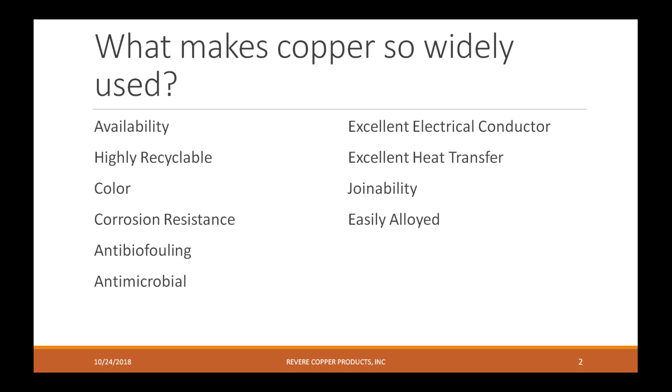So what are those properties and how do they compare? We're going to start with the atomic structure of copper. You don't have to know a lot about the atomic structure to understand that the key thing is that outer electron layer, the outer shell. There's one electron in that outer shell, and that is the same in gold and silver. And that one electron gives it a lot of those properties that make it similar to gold and silver as far as reactivity and conductivity.

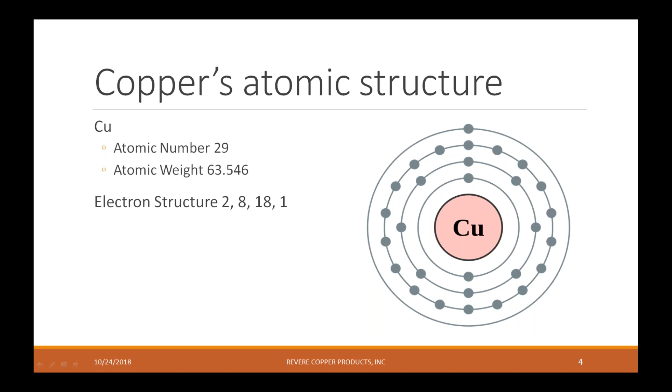So here's kind of a comparison. You can see the electrical conductivity of silver at 105, copper at 100, gold at 70. Those three are pretty close. And there's a significant drop when you get into aluminum, and it goes all the way down to iron at 17%. And then for thermal conductivity, you'll see copper also very similar to gold and silver, and then you see a drop for aluminum and then all the way down to iron.

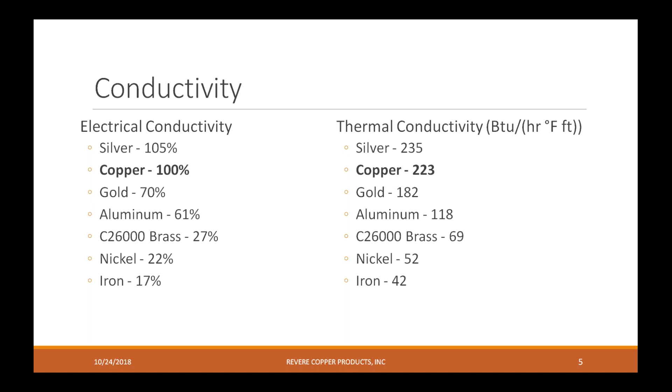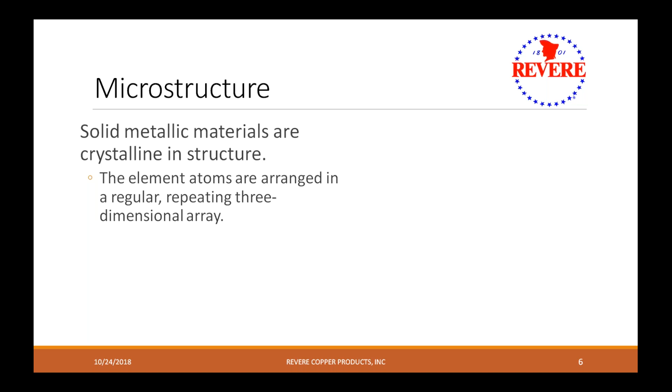So what makes up all those properties? We're going to dive deep down into the microstructure of copper. All solid metallic materials are crystalline in structure, and with copper, it is in a structure called face-centered cubic. So if you look at that picture, you can see that those black dots represent atoms in the crystalline structure, and the black dots in the center of the face are what make it face-centered cubic.

Now that crystalline structure determines its physical properties. And the face-centered cubic elements tend to have better ductility and better malleability. Silver and gold also fall in there.

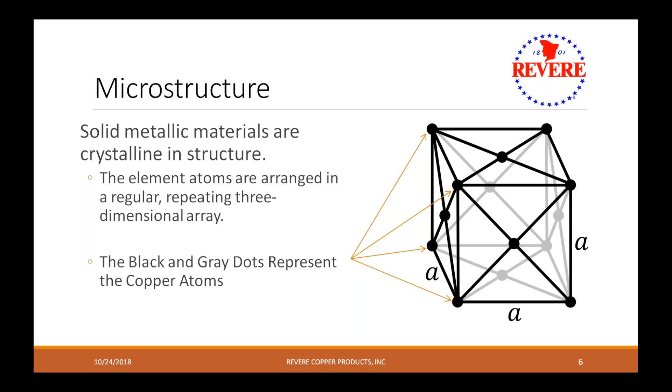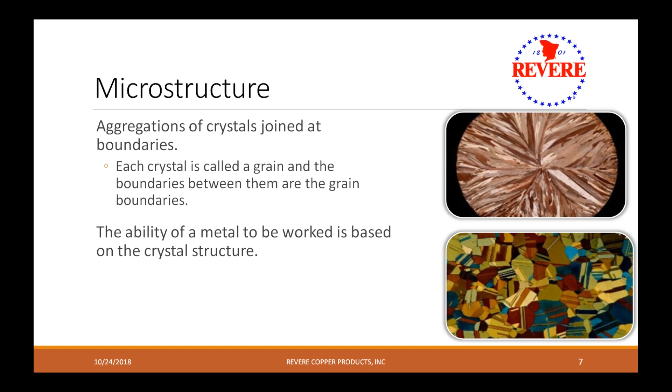So if you look at copper under a microscope, you can see those crystals. Each of those crystals is called a grain, and the boundaries between them are grain boundaries. The top picture actually shows a billet that was cast, and it freezes toward the middle, and the grains grow toward that freeze point, so the grains are elongated towards the middle. The second picture more closely resembles copper that's been rolled or cold worked and annealed, so in that case the grains don't have directionality. The ability of metal to be worked is based on this crystalline structure, so what you can do to it, what it's capable of.

So what can you do and what can you measure with copper? You can measure the ductility, which is measured by yield strength and elongation, strength, which is measured with tensile strength, the hardness, and then it also has electrical conductivity.

So customers look for different properties depending on end use. Obviously, conductivity would be really important in electrical applications, but if it was going to be drawn into, let's say, a deep bowl shape, ductility and elongation would be extremely important. Or if it was going to be used as a structural support, you'd want high tensile strength.

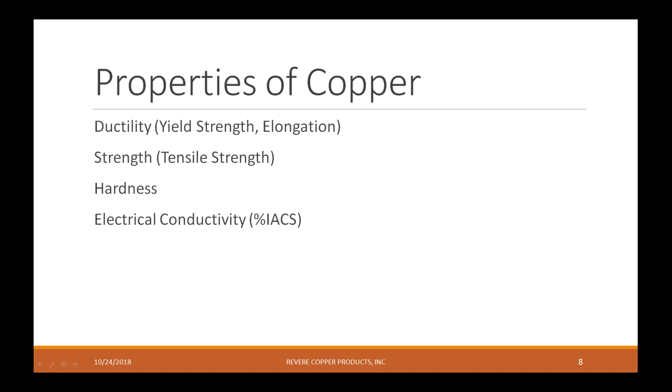Now, you can get all of those properties from copper depending on how you cold work it. So how are those properties developed? Cold work is basically doing any work to the metal while it's cold. What happens is those crystals are deformed and it causes stress and it raises the tensile strength or hardness. Some examples of cold work are rolling, drawing, or hammering.

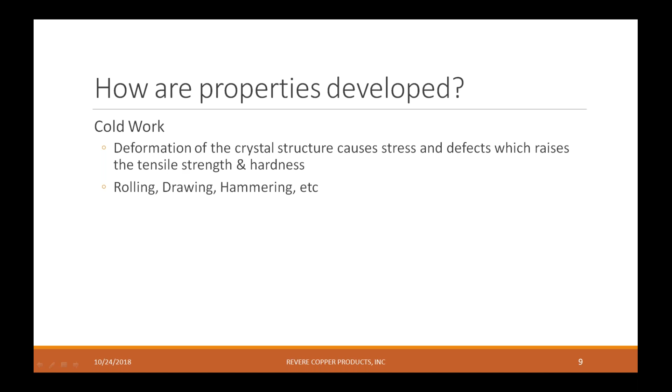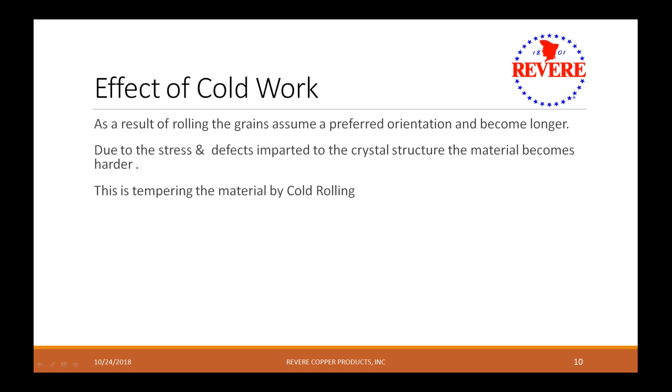So what happens to the metal? As a result of rolling, the grain assumes a preferred orientation. It becomes longer—I'll get a picture here. Due to the stress and defects that are put on that crystalline structure, the material becomes harder. And so that's also called tempering. You've tempered the material by cold rolling.

So you can see when it's first going into that first set of rolls, the grains are big and they're non-directional. And then as you roll it, the grains get smaller and squished and elongated and they become directional.

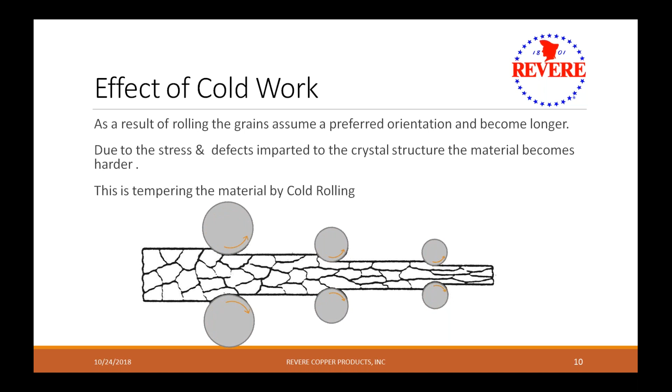So I have a picture of what that would look like under a microscope. That first picture more closely resembles the structure after it's been maybe cold rolled and annealed. So you've got good grains, good grain structure. You can see it. There's not a lot of directionality.

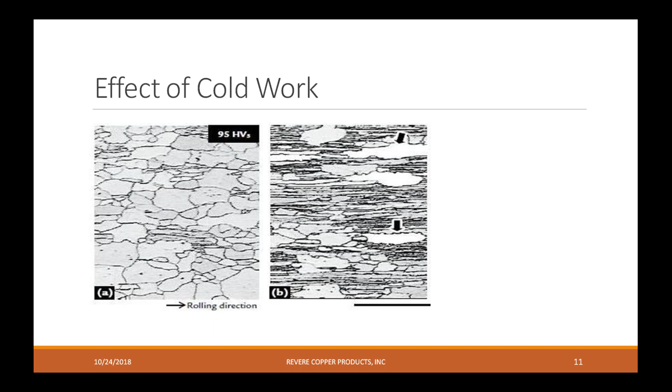Then as you start to do a reduction through rolling, those grains get squished. They start to get elongated and directional. And eventually, they almost get smeared out. You can barely see the grains in the last picture. That's after quite a bit of cold rolling, it would look like that.

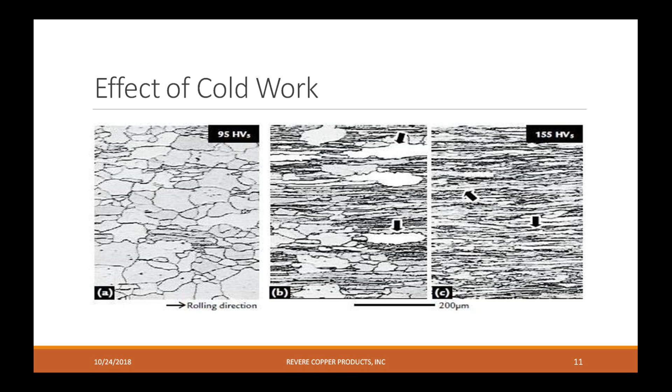So a little slide on what cold rolling is. We have many configurations for rolling mills. This would be a 2-high configuration. In this case, you've got 2 big rolls that are putting pressure on the metal, which runs through the middle and does a gauge reduction.

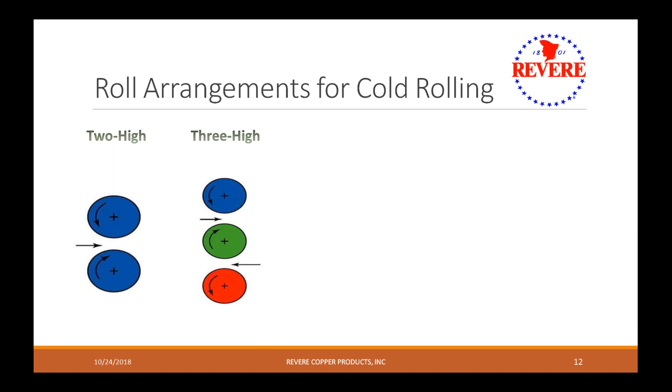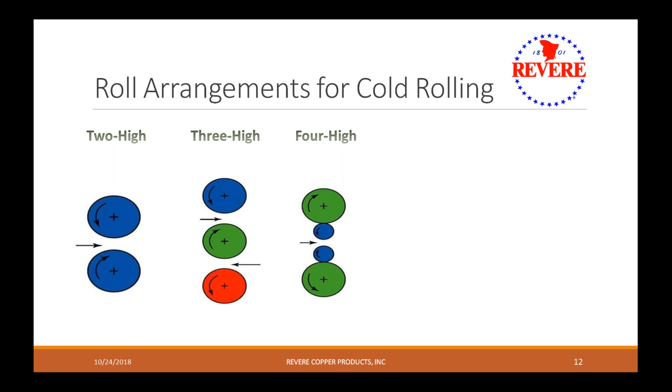And then there's also a cluster mill design, or a Sendzimir mill. With the cluster mill, you've got a lot of rolls. You've got driven rolls and bearing rolls, and those tiny rolls in the middle are your work rolls. The cluster mill gives you some better gauge control usually and some better shape control than some of your other mills.

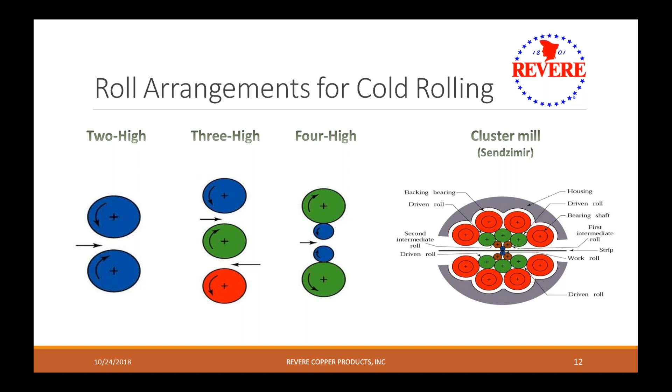So what happens to the metal mechanically while you're rolling it? As we mentioned earlier, you make it stronger. You add strength to it by deforming those crystals. That top slide shows an increase in tensile strength as you reduce the thickness.

So let's say you started with a piece of copper that was a 1/2 inch thick roll of it, and you rolled it down to a 1/4 inch. You did a 50% reduction. Your tensile strength would go from about 200 up to, it looks like, about 350. And then your elongation at the same time is going to go down—that's your ductility. So as the metal gets harder, it becomes less ductile. So at the same reduction, going from a 1/2 inch to a 1/4 inch, your elongation will go from about 40% down to almost nothing.

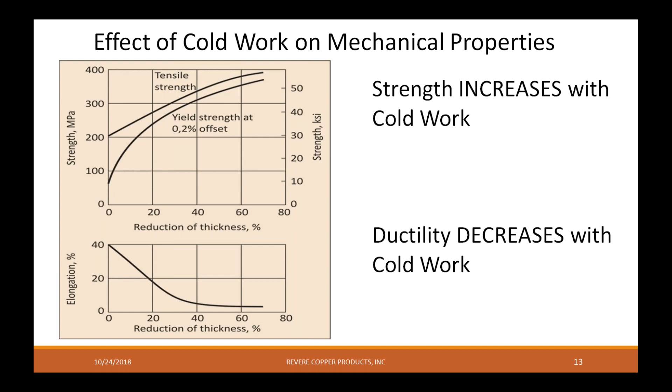So strength increases with cold work, and ductility decreases with cold work. That's really the takeaway from that.

Now, when a customer orders copper, they're looking for certain properties. So if they wanted both strength and ductility, they would have to order something that's got some cold work to it, but it's not full hard. For example, a roofing copper would be ordered generally at quarter hard, because you want the hardness, you want it to be resistant to dents if it's going to go on the roof, but you need it ductile enough to be able to form the seam.

So this is an example of different hardnesses for hard metal that's ordered, and the key to getting that property is a percent reduction in thickness after the last anneal.

So back to my other example where I did a 50% reduction, that would be extra hard on this chart. If you look at extra hard, and you went from a 1/2 inch and rolled it to a 1/4 inch, you would have a 50% reduction, and your tensile strength would be 47 to 56, and it would be designated as extra hard, or H06.

This chart shows all the different options that you can order metal through, and this is the ASTM standard.

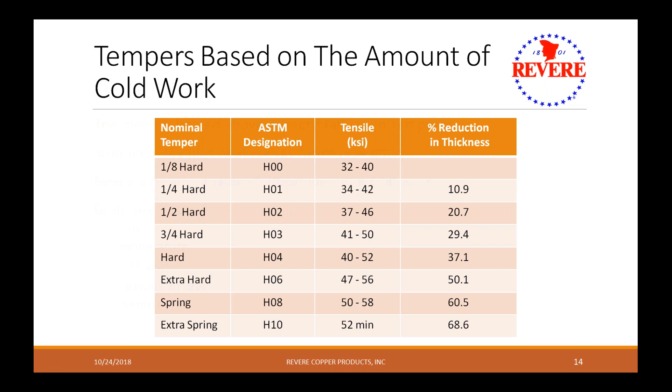So now I mentioned that your hardness is dependent on the reduction after the last anneal. So what is annealing? Annealing is basically a reset for the metal. You can't just roll and roll and roll, because it gets harder and harder, and you get to a point where it takes too much force to do the reduction.

So you anneal it. Let's say I gave that example of a 1/2 inch down to a 1/4 inch. Well, let's say your metal starts at a 1/2 inch, but you want to order it at 0.01 gauge. You might not be able to roll it from a 1/2 inch down to 0.01 — it would get too hard. So you have to have a reset at some point in there, which is what annealing does.

With annealing, the metal is heated above its recrystallization temperature. Stored energy plus heat energy forms new grains, so those grains grow again, and those new grains are capable of absorbing more cold work. So now you can roll it down further.

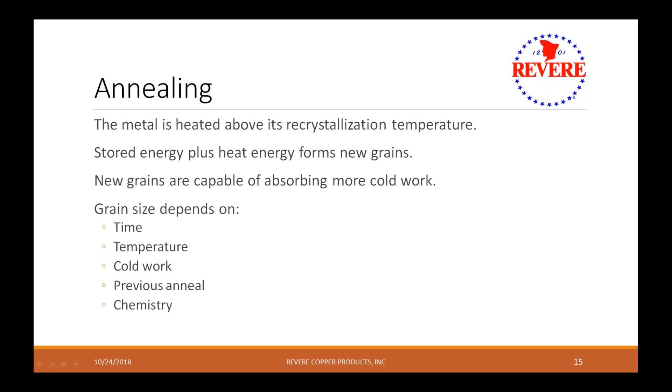So the grain size depends on time, temperature, the cold work done previous to the anneal, and if there was an anneal done previously, and also the chemistry — how pure it is, if your copper is 100% copper, or if there are impurities in it. Metal can be ordered soft, and when it's ordered soft, it's annealed as a final step. And when metal is ordered soft, frequently it's ordered to a certain grain size, so there'll be a little bit more about that moving forward.

So just a little bit more about annealing. This graph shows the hardness versus annealing temperature if it's annealed for 30 minutes with 60% prior cold work. If you think back to that other chart I showed, 60% means it was spring hard, or H08, and then it was annealed for 30 minutes.

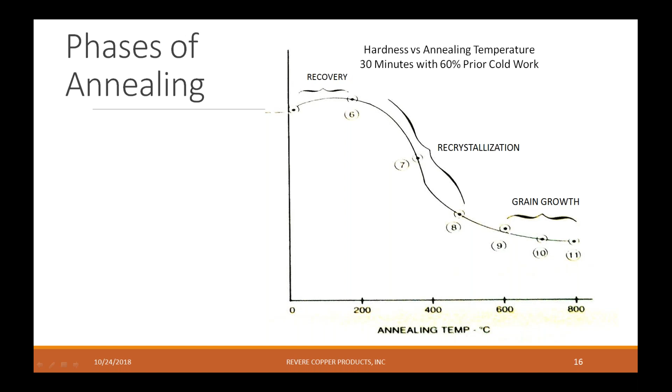You can see that at 600 degrees, you start getting grain growth. At 400 degrees, you have recrystallization happening. So depending on how much grain growth a customer wanted, that would be determined by the temperature, and also time. This next slide shows a little bit about time considerations with annealing. So you can go with a lower temperature and a longer time. Basically, higher temperatures shorten anneal time, or lower temperatures require a longer time, and that's for grain growth.

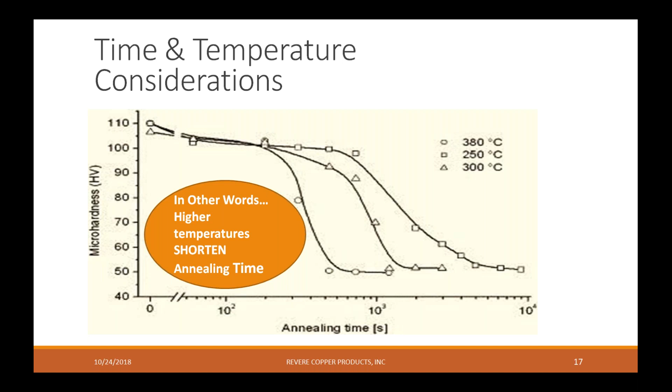So if you were going to order soft metal, what would you see from different grains? Some considerations of grain size: the first one is strength. Fine grains result in lower elongation and higher mechanical properties. That would be if you annealed it just so it had recrystallization but not much grain growth — you can get stronger copper, but it's not going to have the ductility or elongation.

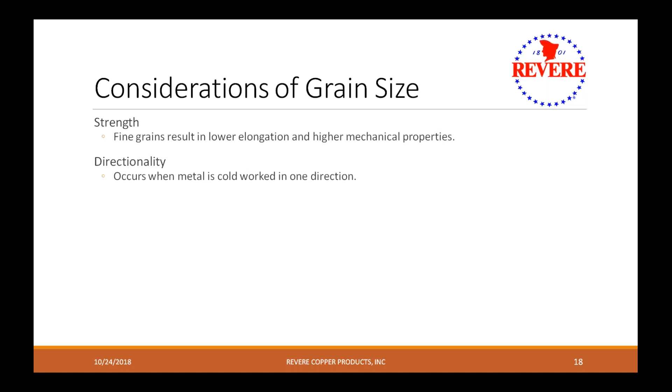Directionality occurs when metal is cold worked in one direction, so we create directionality when we roll it. Then when we anneal it, you're trying to remove some of that directionality when you're growing your grains. Depending on the grain size, you will retain some directionality. If you wanted big grains, you can remove that directionality, but with little grains, you might retain some of that — so you might have stronger metal that's got some directionality.

Formability kind of goes along with the strength — it's kind of the opposite. The larger the grains, the fewer the boundaries, the greater the potential for deformation. That just means you can pull it deeper, make a bigger bowl or a deeper draw on it if it's got larger grains. And then the more grains it has, the less it will draw.

And then finally, surface. There's a condition called orange peel, and if you do a lot of cold work to metal prior to annealing, and then anneal it to the point of a lot of large grain growth, large grain structure, you can get a surface that looks like orange peel. Whereas if you anneal it for a shorter amount of time or a lower temperature, you'll have a smoother surface — it'll give you more of a cold work looking surface if you have fine grains.

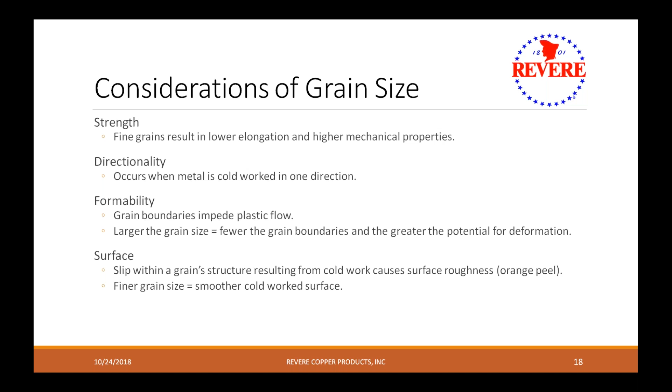So I'm going to put that all together for you, a lot of information to process into basically what do you do when we're rolling metal.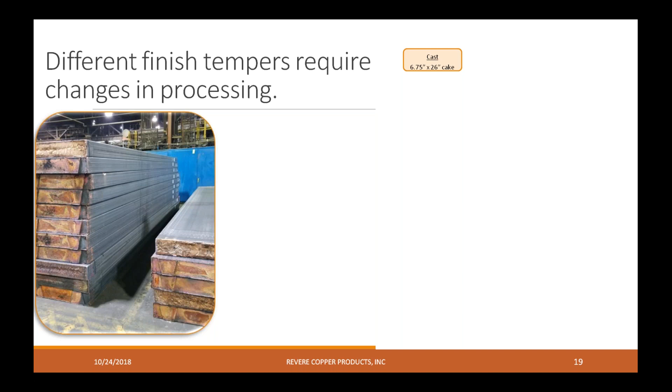So we cast these cakes, also called ingots in the market, and they are 6 3/4 inches thick, and they're black on the outside. That's an oxide that forms, and that has to do with the copper being highly reactive. It's heated to 1700 degrees for 2.5 hours. This particular cake was 6 3/4 inches thick, 26 inches wide, and 25 feet long.

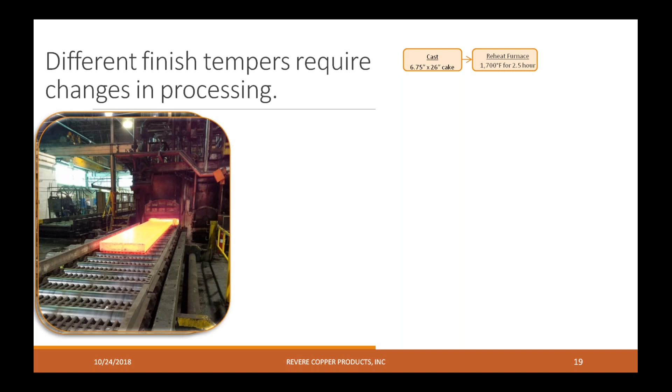So now it gets rolled, from that 6 3/4 inches thick down to 0.55, which is a little bit more than 1/2 inch. But this work is all being done while the metal is hot, so this is not cold work. So when this metal comes out as a coil that's about 1/2 inch thick, it's in that reset condition. It's basically been annealed. It doesn't have directionality, it's got big grains, and it's ready for processing.

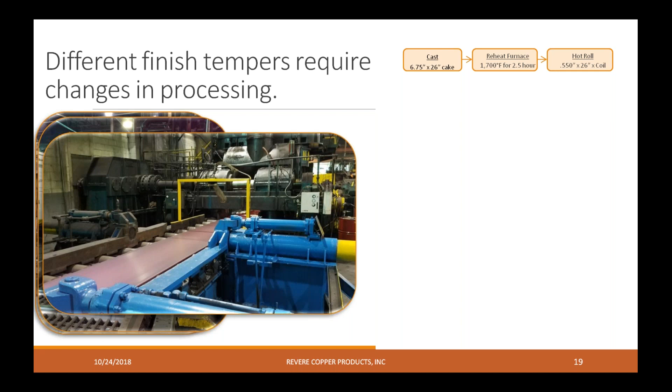The first step is an overhaul process, and that's because when you heat the metal, you get oxide. So those cakes were black. As this coil, once it's rolled at 1/2 inch thick, will be black, it'll have oxide on both sides of it. So the first step is to remove that oxide. That's milled, so it's physically scraped off and removed. So there isn't any squishing of the metal or cold work of the metal there.

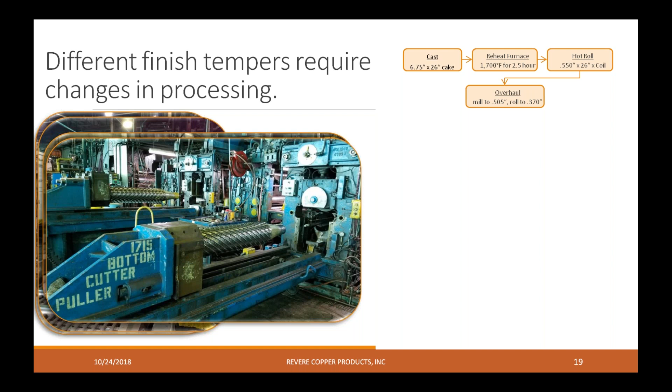So again, you don't have any cold work between 550 and 505. But then our next step, this is where the cold work starts. We roll it to 0.370. So we take that metal and we roll it down further, depending on the order and the final gauge.

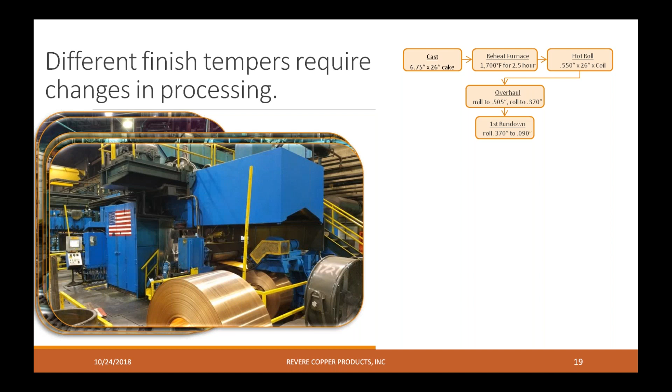And I'm running through an example here, I'll show you what we're headed to in a minute. So the next step is we continue to cold work it from 370 down to 090. That's a 75% reduction, that's a lot of cold work. So this metal is going to be extremely hard at this point.

We can continue to roll that metal, and in this example, we roll it down to 0.042. So now we haven't had any anneals since that 0.505 gauge, and it's very, very hard metal. So for this example, we're trying to make 0.0295 gauge, and I'm going to show you soft on the left side and 3/4 hard on the right.

So the next step is to anneal it. It's gotten extremely hard, and basically we need to anneal it to continue with the reduction. But that 0.042 isn't a random gauge. We didn't just roll it from 090 to 0.042 because that's as far as we could go.

What we're looking for is, in order to get that 3/4 hard reduction on the right-hand side, you have to do a gauge reduction of 29%. So if you want the metal 3/4 hard, you have to reduce it 29%. So to go to 0.0295, the 29% reduction, you have to start at 0.042 after the last anneal. So we get it down to 0.042 and we anneal it.

Now on the left-hand side, it's soft. You can see we annealed it slightly slower at 45 feet per minute versus the right at 55. That's because we're looking for soft properties at the end of that example.

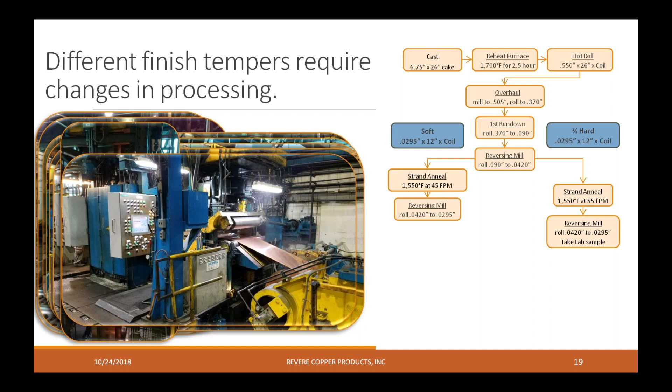So then the next step would be to finish the gauge. It's going to get rolled again, and this is cold rolled. On the left side and the right side, you're going from 0.042 to 0.0295. On the right side, it's done. It's at its final gauge, and we send it to the lab for testing to make sure it meets its temper requirements. On the left side, it still needs to be annealed again because this was ordered soft.

And in that case, it's annealed at 70 feet per minute, so much slower, and that is to hit a certain grain size. Depending on what grain size was ordered, you might range that from 50 feet per minute up to 100 feet per minute. The operators are actually cutting samples right there and checking the grain, and they can speed up or slow down the machine as needed. But we've got that pretty well dialed in as to what speed they need per grain size.

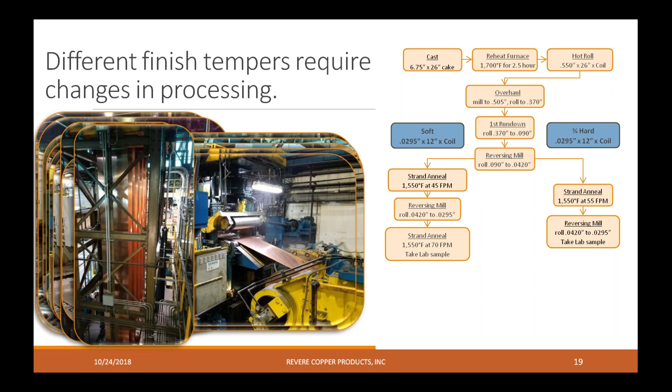Then they would both get cleaned with acid and soap and anti-stain. They'd get slit to their final width, packed and shipped out the door.

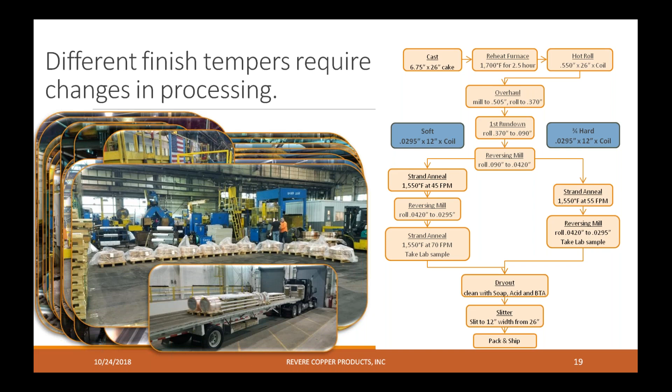So before that metal gets shipped, we take the lab sample. And I want to go through a couple of test methods that we do.

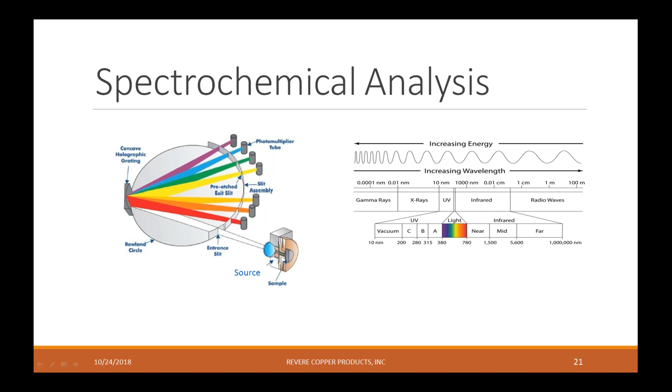The first thing, we always test for chemistry. It's got to be pure. There's an ASTM standard that states what the purity level needs to be, but it has to be pure in order to meet those properties for the anneals to work and for the rolls to work. So we do a spectrochemical analysis to make sure that copper meets requirements.

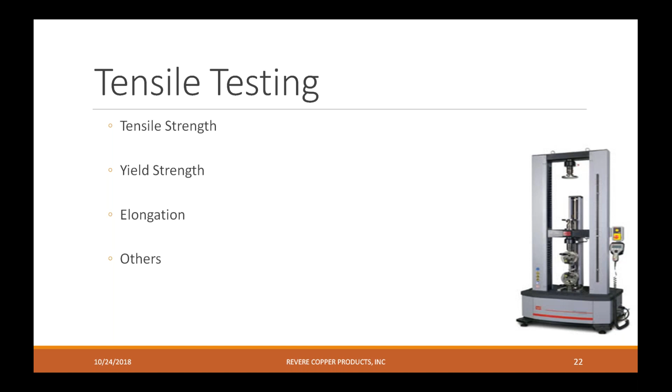Then we do tensile testing. So with tensile testing, we're testing for yield, elongation, tensile, and there's actually others that can be determined through this test. Again, ductility is your yield and elongation.

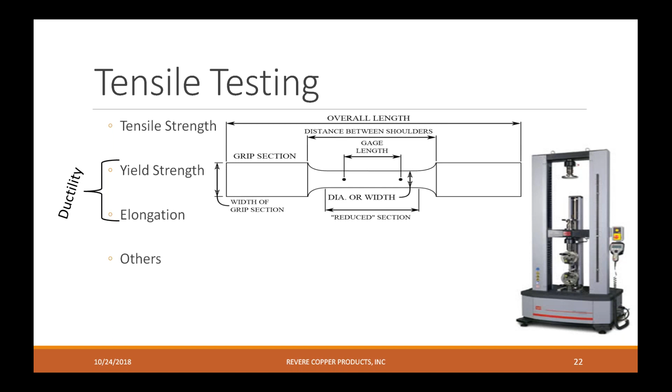And how do we do that? We take a sample of that metal at its finished gauge and temper, and we cut it into this dog bone shape. Then that gets turned vertically and put in the machine pictured to the right, and we pull on it on both ends.

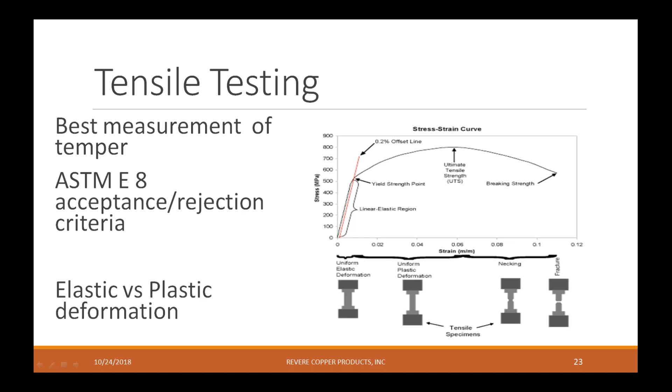This graph represents what the machine gives us for information. If you look at the graph, the yield strength point is the point where you are beyond elastic deformation, so it's a point where the material is permanently deformed. It's not going to go back into place. Then as you follow that graph, the ultimate tensile strength is the most force that gets applied prior to breakage. Those are results that get reported with our product.

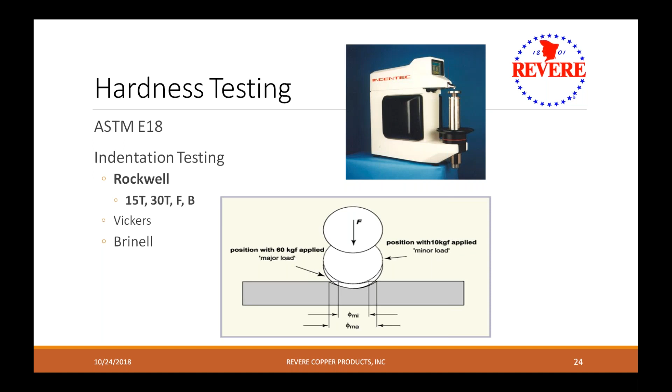Hardness testing - if a customer asks for the hardness, we do a Rockwell hardness test. There's other types of tests, different scales, but within the Rockwell, there's the 15T, 30T, F, and B. Those are dependent on the gauge of the material. You can't apply the same amount of force to a really thin gauge as you can to a thicker gauge, so that's the difference in the scale there.

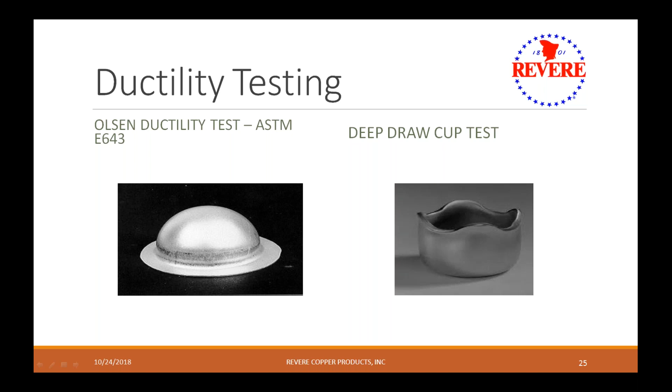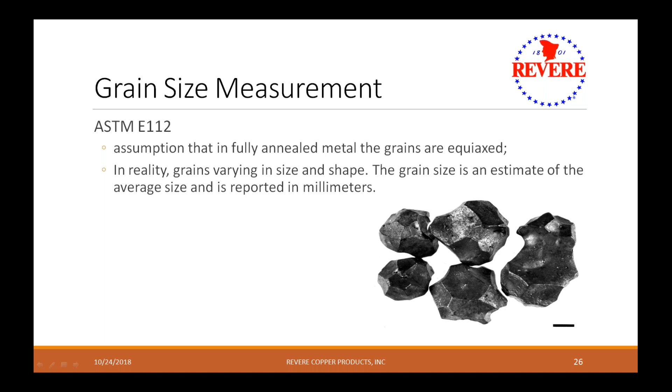Other major markets: electrical - bus bar used in electrical panels, or transformers. And then finally, another major market for us is HVAC, and what that is is refrigeration units on cargo ships.

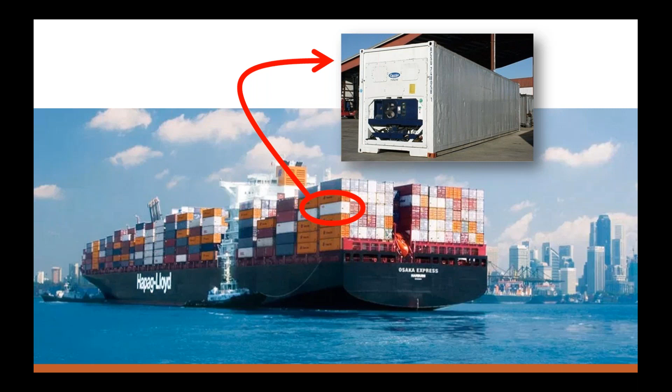And that is the end. So I'm going to open it up to questions.